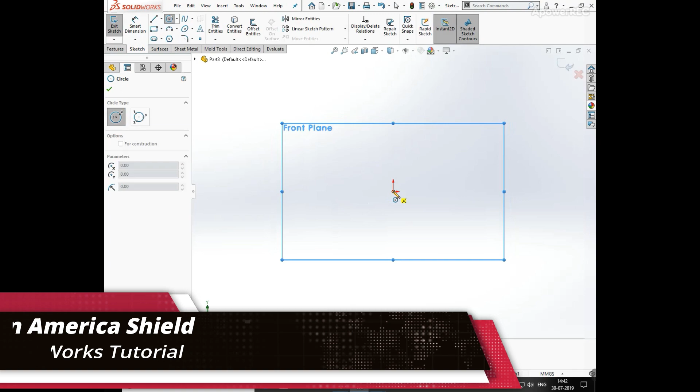I draw a circle having diameter 500 mm and convert that circle into construction geometry. Now I am going to draw an arc with the help of 3-point arc, defining arc radius is 400 mm.

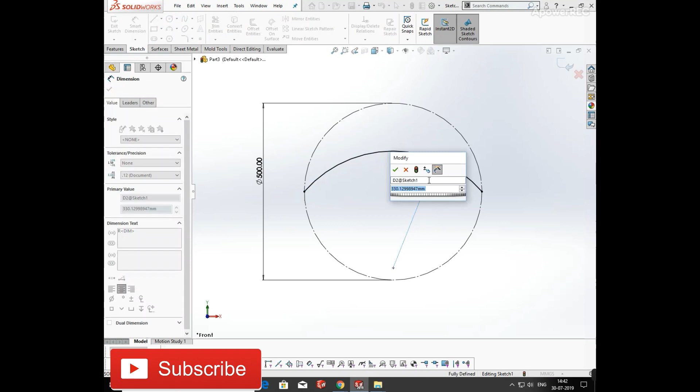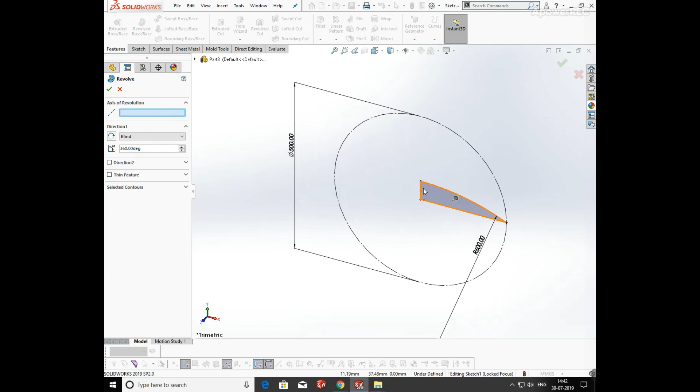And add relation horizontal. Now draw a line and meet with the end point, then trim the extra sketch and select the revolve base command and revolve it about the center axis.

Now applying the shell command, applying its thickness is 2 mm and shell the part.

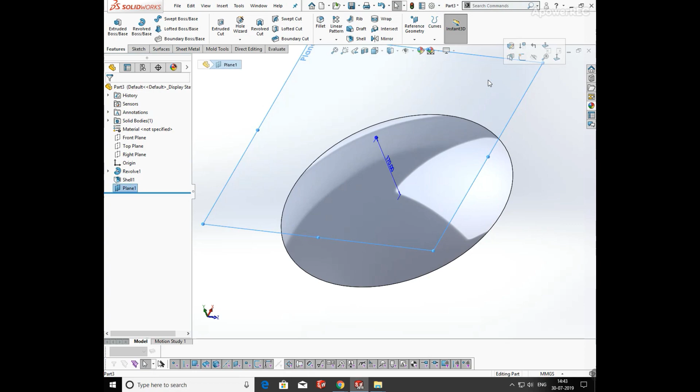Now select the face and select reference plane at the distance of 170 mm and again draw sketch. So select the edge and click convert entities.

Now making offset of the sketch in the inside direction about 40 mm and again repeat the offset command and make offset 2 times.

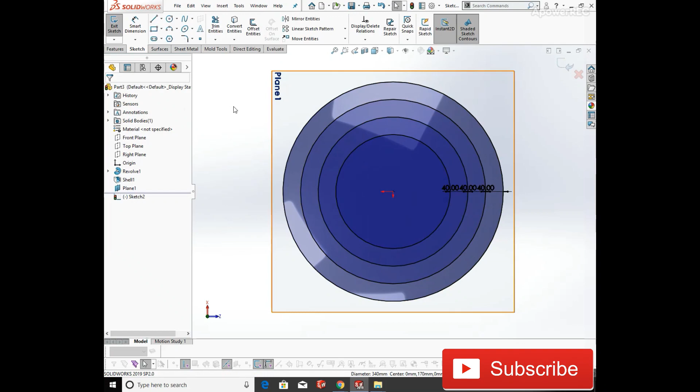Now select polygon and enter 5 sides of the polygon and draw a polygon.

Now choose the line command and meet all the points with the line command one by one, as shown in the video.

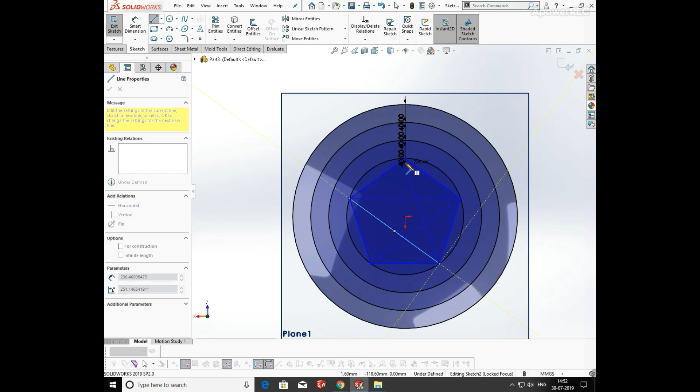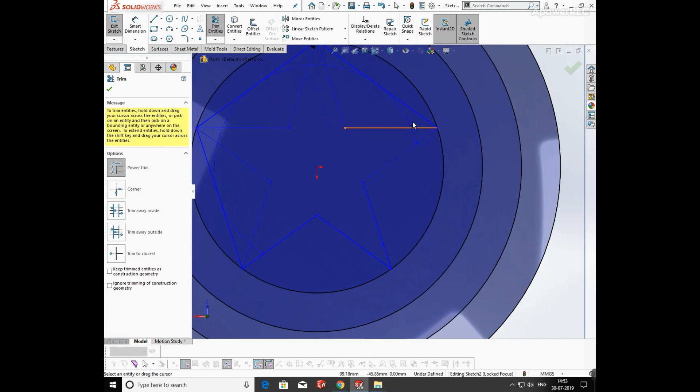Now select trim feature and trim the extra sketch. You can also convert it into construction geometry, or if you want to trim then you can trim. So now I am trimming the extra sketch.

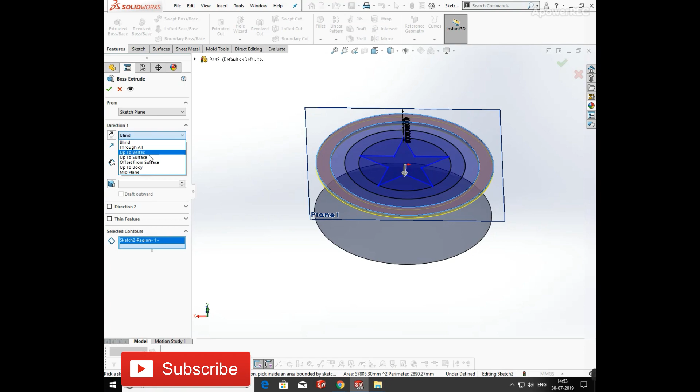Now click on extrude boss and select contour. And select up to surface, and click on sketch.

Extrude base the second one circle. So again select sketch and up to next, and extrude base.

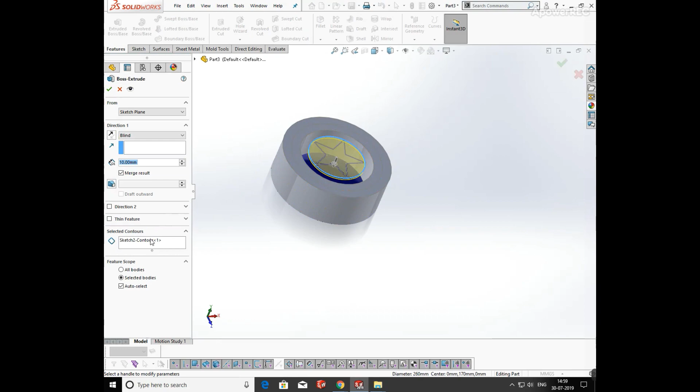Again select extrude boss command and select contour. Again select up to next, and don't merge the body with the lower surface.

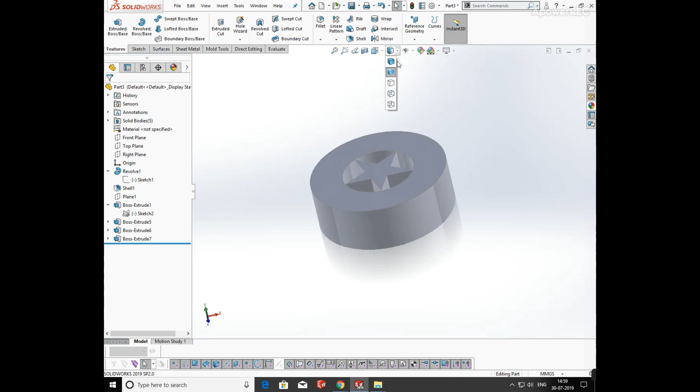Now hide the sketch and choose top plane. You can show the sketch. Now again selecting front plane and keep it in normal position.

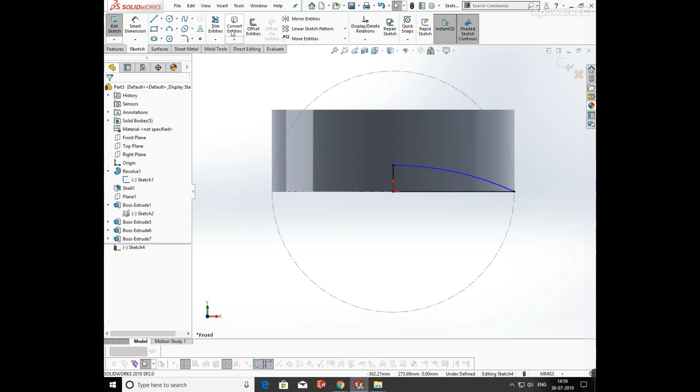So draw line and an arc. And make offset of the sketch of 2 mm, and draw line command, then trim the extra remaining sketch.

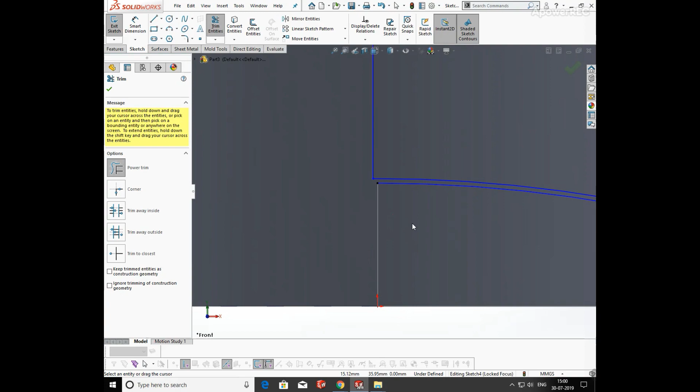Click on OK and select the feature command and applying revolve cut with the reference of center line, and hide the extra sketch.

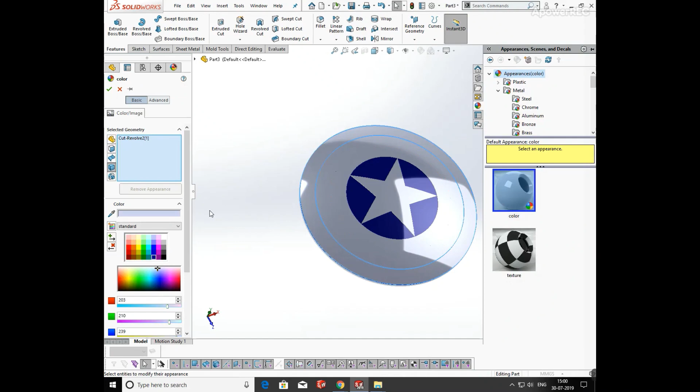Now I am going to apply the appearances on the body. Select red color. On the upper side, the shield is almost created.

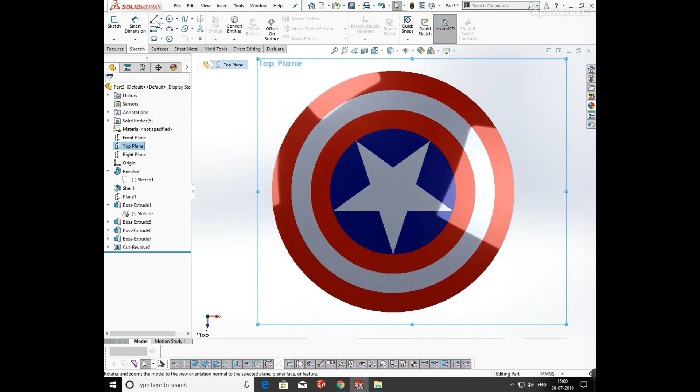Now again choose the plane and draw a circle. Convert the center circle into construction geometry and define the diameter as 20 mm.

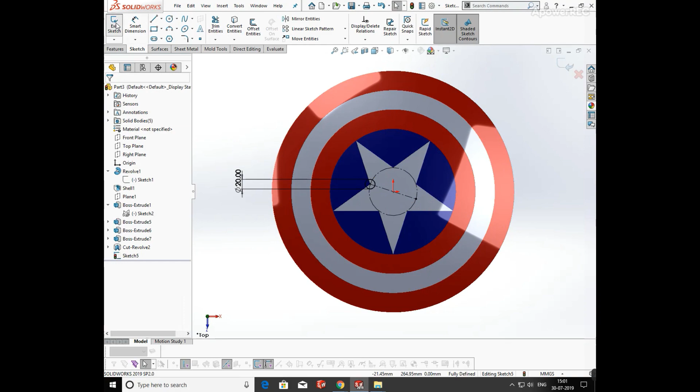Now again draw a circle of 20 mm and select extrude boss command and extrude it boss up to next.

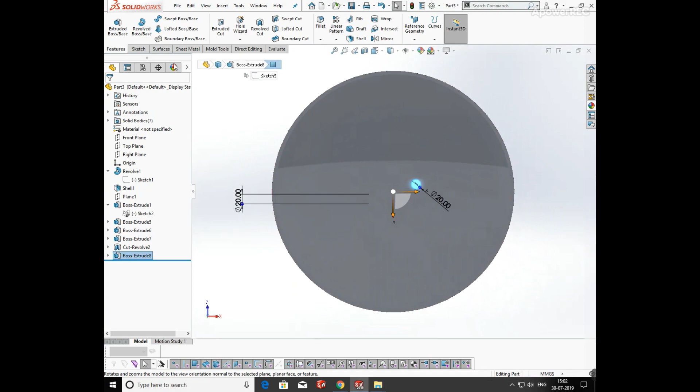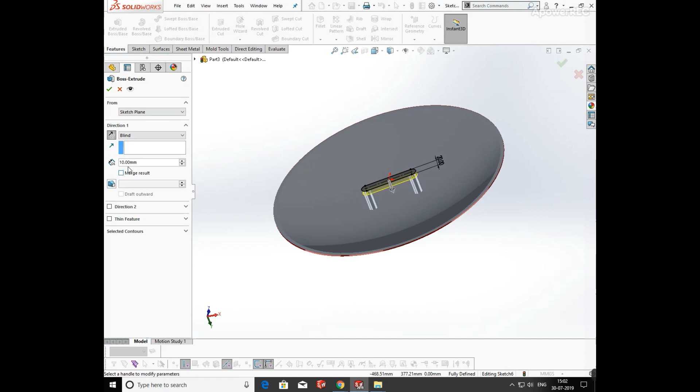Now select the top face of the extrude base feature and draw a slot, defining its width as 20 mm, and select feature and extrude it both in the downward direction as 10 mm.

Now copy the appearances and paste them on the extrude base feature.

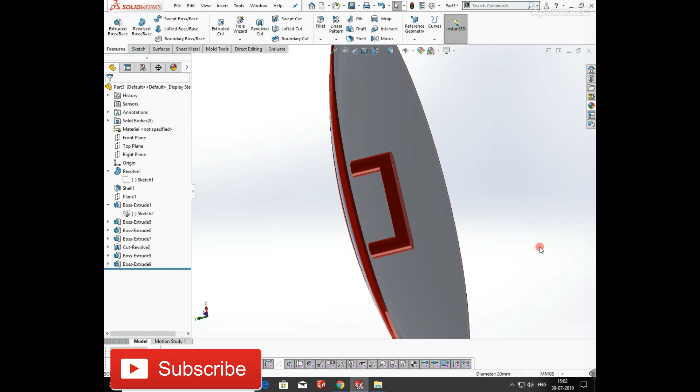After applying appearances, I am going to apply fillet. So select the edge and define the fillet dimension as 5 mm on the edges and click OK.

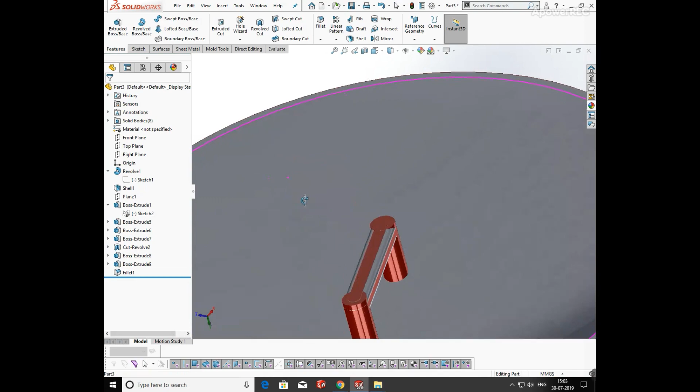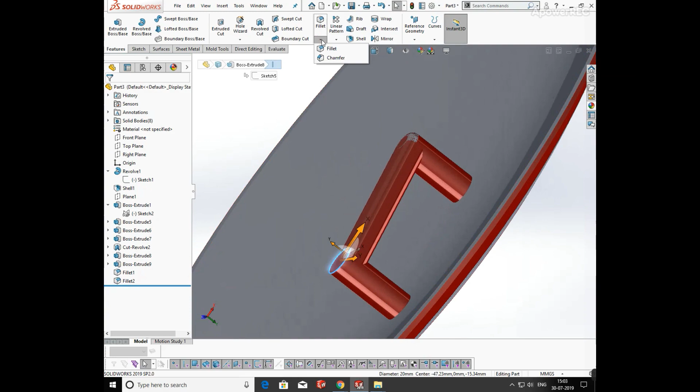After that, again choosing the fillet command and applying fillet of 5 mm on both sides.

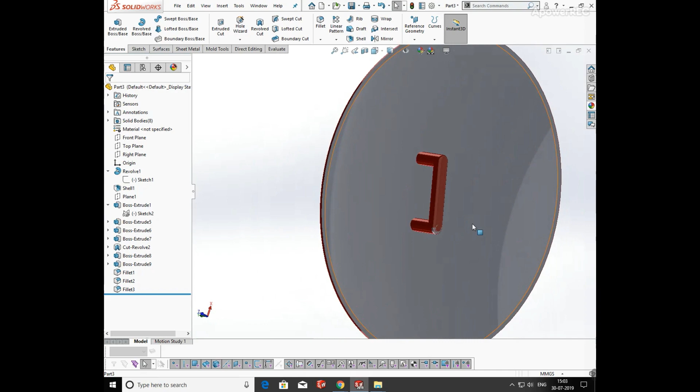Now also applying appearances on the handle. You can apply appearances on the face or apply appearances on the whole body.

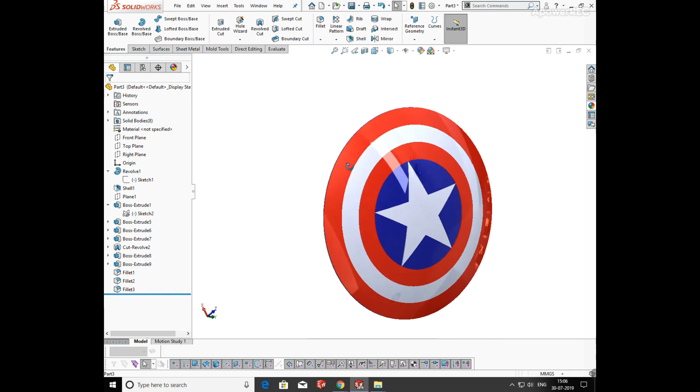Now I am going to change its background. This shade is ready. You can have a look here, it's looking pretty good. I'm changing its background for a better view. You can see different views by pressing the space bar.